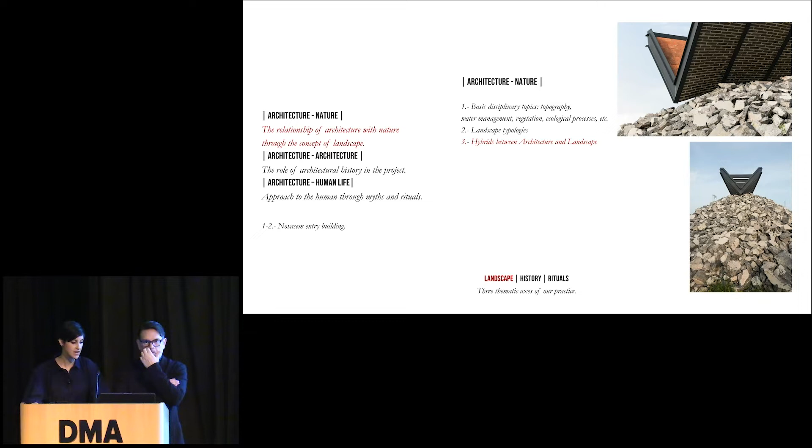Then we decided to mix those typologies with architectural elements to produce moments like this, where a brick roof is supported by a stone mound for an entrance building, or where the spaces between buildings could be understood as places where the void becomes a human experience in relation to the landscape.

Our second axis is the relationship of architecture with architecture itself, through the subject of history. For us, the presence of the past is a very important matter for the discipline, as we include our practice in the idea of continuity.

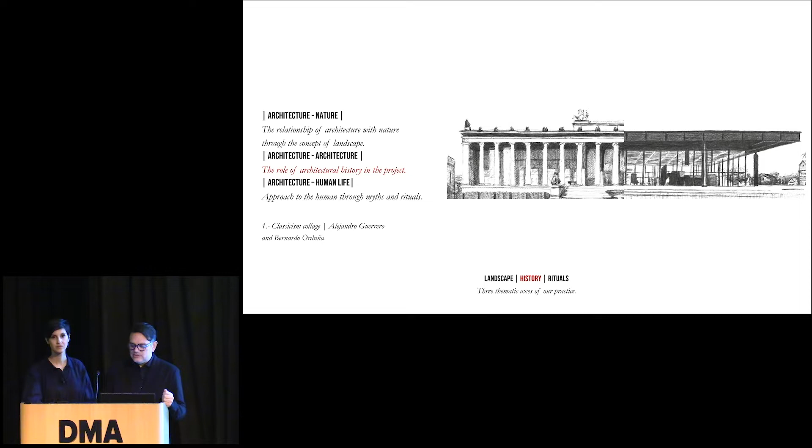As our dear friend, the architect Carles Muro, told us a few weeks ago, and I'm quoting: 'Unlike the historian, for the architect in the present, all the history of architecture is at the same distance.' For us, that means we learn and practice by observing the history of architecture as a whole. From the Doric temple to the modern masterpieces, we consider architecture as a story about tradition and evolution.

Guadalajara, the place where we live and practice, has a strong tradition in architecture. A certain distance from Mexico City and other major capitals of the world perhaps made possible a cultural process of introspection, mainly during the 20th century.

That condition produced very well-known architects like Luis Barragán, writers like Juan Rulfo, and painters like José Clemente Orozco. It didn't mean they were secluded from the world. It meant that having known the world, they came back to recognize themselves within their own culture.

When we start a project, we enter a reflection that can lead us from the definition of a simple architectural element to the conception of a whole system. As with many other practices, the notion of typology is very important in our process, but we have found that certain themes are always present in our minds.

Those themes or ideas, sometimes very architectural, sometimes not, have helped us obtain clarity about what we want to develop in each case. Penumbra, excavation, transparency, perspective, void, monumentality—just to name a few—are subjects that can guide a whole project, and their use has to do with the analysis of every situation.

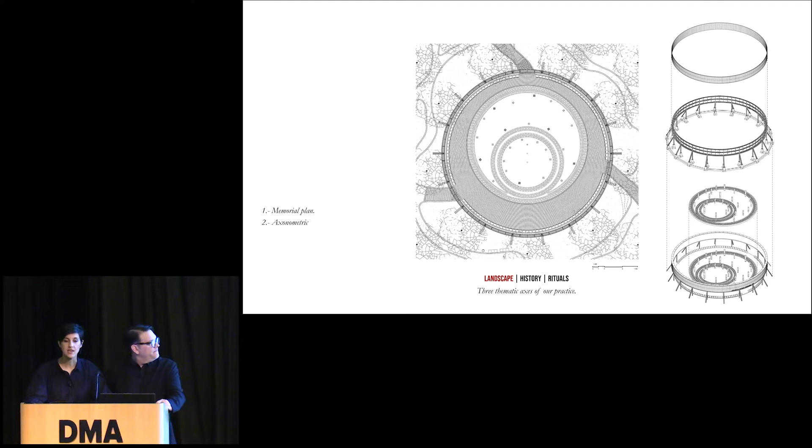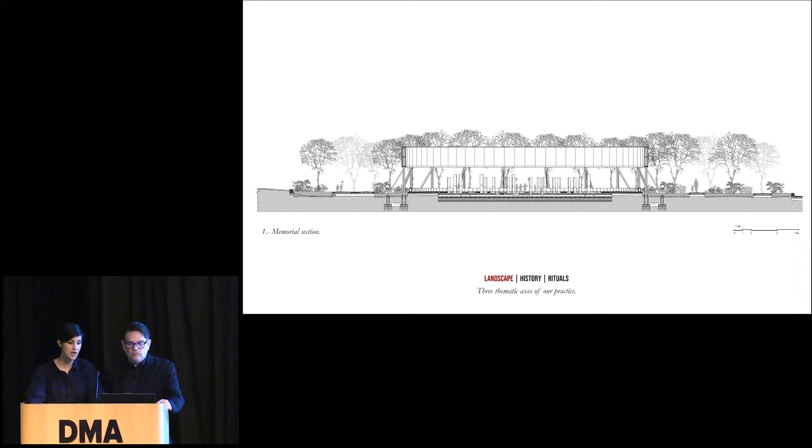Based on the idea that a public space is safer to the extent that its elements do not imply a visual obstruction, and with the aim of making it inclusive and accessible, the construction of the ring was raised almost 3 meters, with the ability to delimit the central space understood as the core of the monument.

The circular lined enclosure of our project, surrounded by 2 rows of magnolias and low vegetation, contains in turn another series of internal spaces which gradually configure small thresholds around a body of water.

The result is an internal void that can be discovered and experienced by wandering through the park into an enclosed space that reunites people around a reflecting pool with the 26 stelae that represent each one of the victims.

The pond is a space not only to be observed, but inhabited, while the stones placed on the water allow the visitor to walk on them and thus interact with the stone and granite stelae and to get closer in a more intimate position.

There are also messages written by the families that communicate the tragedy that are set up in the interior frieze of the ring.

As we mentioned before, each of the monoliths that were placed in the pond have the name or initials of the victims engraved, and also contain symbolic figures according to the wishes of each family.

These symbolic figures represent mainly hummingbirds and butterflies, but for us it was also important to manifest them in real terms by attracting pollinators through the use of a specific plant species.

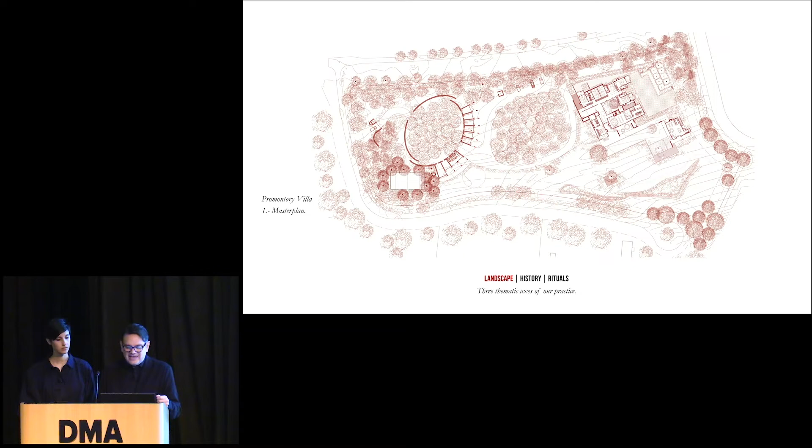The first moment is the oval-shaped garden planted with maple trees that also contains a horse stable. The second moment is a group made of liquidambars that acts as a reception for the entire place. And finally, we surrounded the house with a mound that functions as a limit to avoid views from the exterior.

The project for the horse stable is part of a stone enclosure that functions as an entrance threshold to the property. A series of stone bases with wooden roofs and ceramic coverings are attached to the oval layout of the enclosure that captures a grove as an interior landscape.

This architecture is in fact a reinterpretation of the local construction system in which load-bearing stone walls support layers of wooden elements such as beams and framework, and that is finally covered with traditional ceramic tiling. But we believe that the curved trace of the building modifies the aspect, giving a sense of contemporariness.

The house is organized using the central patio typology, accommodating a series of modules that contain public and private rooms, and in whose middle spaces we can find visions that escape towards the exterior landscape.

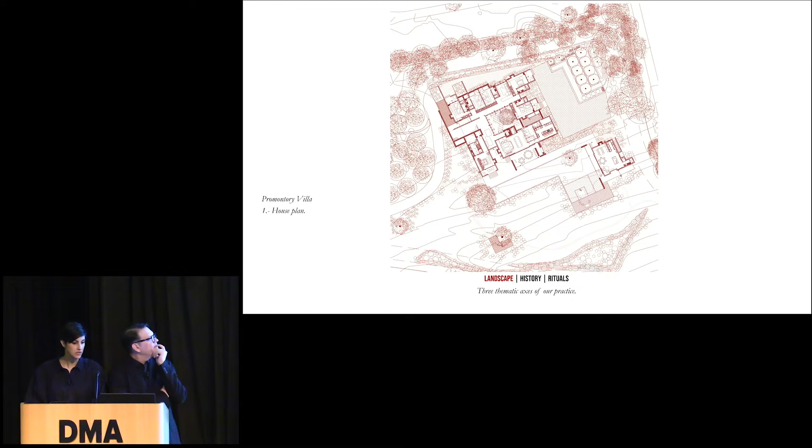This conception based on fragments refers to the idea of village, understood as little town. To reinforce this idea, each of the rooms has a fireplace whose vertical geometry is clearly manifested in the general composition of the complex. In this image, we can see the relationship of the mound, full of endemic vegetation, with the house.

The mound helps us create a more intimate space within the landscape. With a merge of ornamental and native flora, the landscape recalls the prairie character typical of this region. The architecture proposed tries to recall many elements of the Alpine traditional construction of this place, such as the use of wood, shutters, and lintels, but used in a contemporary way due to a subtle abstraction process of the elements.

The fragmented conception of the house through little individual modules allowed us to produce, on the one hand, the image of this little town, and on the other hand, to accommodate a very large family in different rooms. We believe this is a project in which we could experiment with the idea of this fragmented system, where the architectural form is not very controlled by the architects in terms of composition.

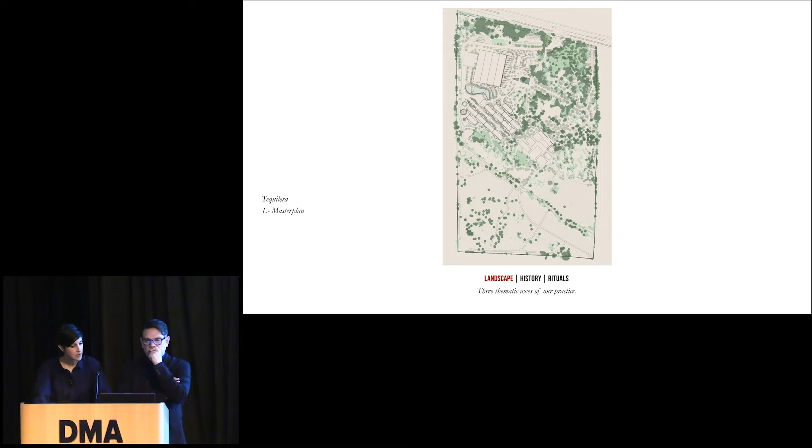As we wanted to relate as much as possible our project with the narrative of the volcanic origins of the landscape, we decided to work with stone extracted directly from the site, having as a result the immediate adaptation of the architecture with the place in material and geological terms. As part of the landscape strategies, the stones are revealed in gardens to show the mineral strata of what exists below the subsoil and remains most of the time invisible.

At the beginning of our intervention, we said we were interested as a practice in the possibility of blurring the limits between architecture and landscape. So we took advantage of the opportunity of this project to carry out what we consider a hybrid between industrial architecture, craft, and landscape. As a first operation, in order to obtain a flat platform where we could develop a 6,000 square meter building, we implemented a huge excavation in the slight slope of the natural topography.

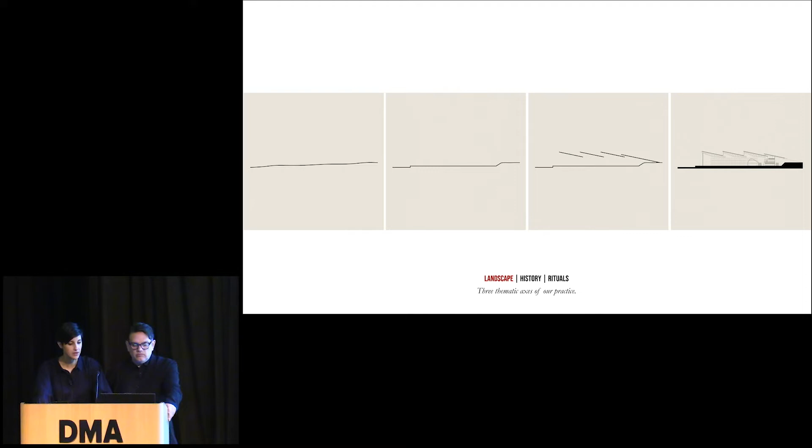The client commissioned us to make a building for a warehouse with offices and other services. The implementation of a massive steel structure allowed us to obtain a flexible system that could house those different uses, applying variations whenever needed.

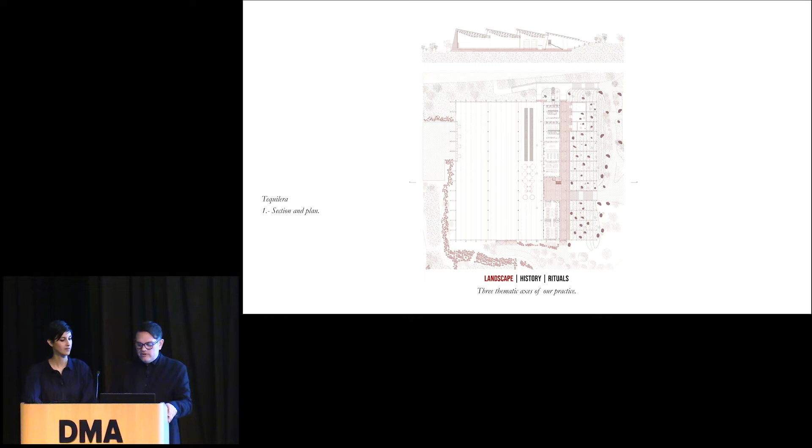The hybrid at a constructive level consisted in mixing the steel structure with brick load-bearing walls and brick vaults. Those traditional construction systems were taken into another scale in order to produce an architecture capable of being read simultaneously as monumental, traditional, and contemporary.

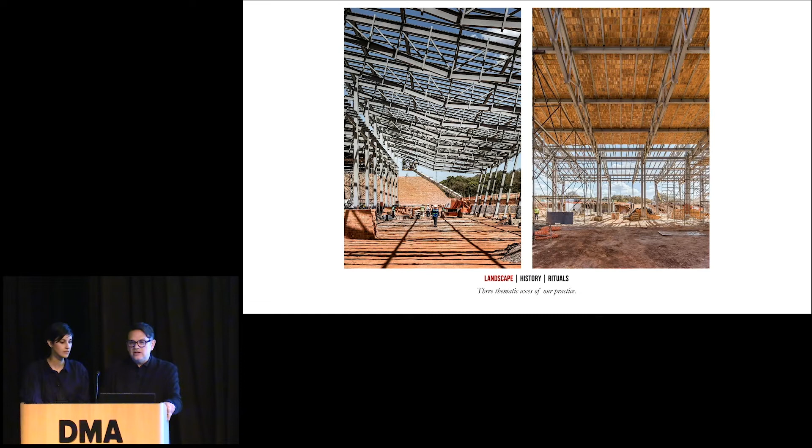The building, during its construction process, accounts for that hybrid condition to which we refer. The use of load-bearing walls can be seen on the outside, and the use of metal trusses can be seen on the inside. The use of structural buttresses, in addition to working as a reinforcement, gives the building a certain historical air that also interests us as a disciplinary continuity, and the sawtooth roof evokes the most classical industrial architecture.

The main idea for the building consisted in making it land into the ground, having in mind the difference in the pre-existing topography. How can we make a structure that has something to do with the earth in a broad sense? How can we build something that can belong to the site at many different levels?

Since we were asked to design a large-scale structure, we decided to make a building that had a topographical relationship with the land through an excavation to build what we call a ceramic horizon. This strategy would reduce its presence on the site.

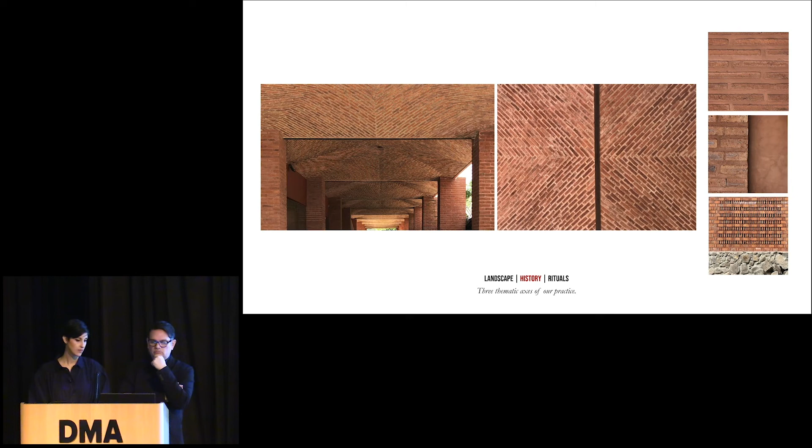Although none of these former buildings had heritage value, we decided to recover them and integrate them into the new complex, to which we added 3 new elements: a library as the facade of the complex, a longitudinal service building with music and dance classrooms and an open-air amphitheater, and finally, a large central reflecting pool.

The location of the new buildings was done so that they function as limits and so that their presence conveys the idea of enclosure.

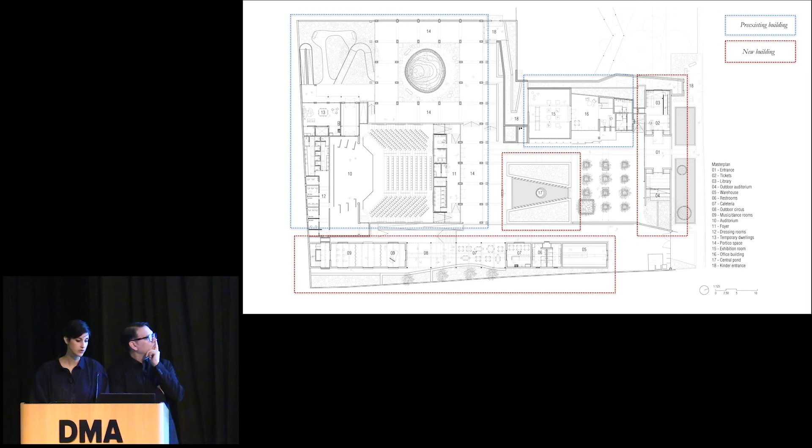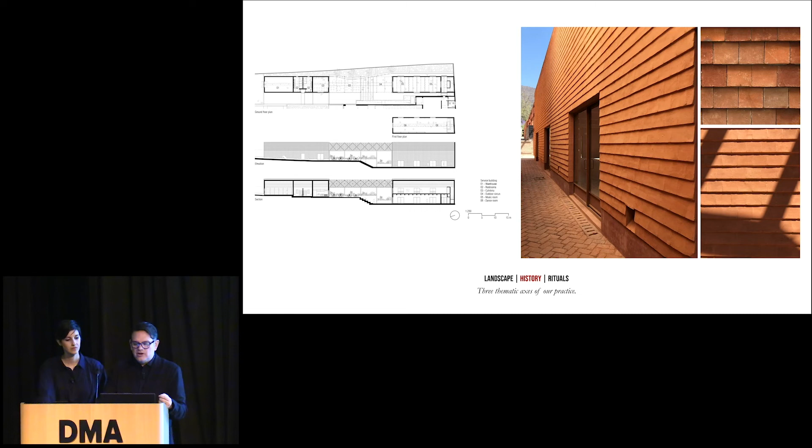The first building we placed in the east part of the plot, producing a strong limit as it is a very long piece. We implemented a shingle-style cladding for exterior walls and roof, a resource that we love and that we have seen in the San Francisco and Boston area, but that in reality is a form that we can find in the traditional architecture of many regions. In Mexico, we know it as tejamanil, and we decided to implement it with a very traditional and local ceramic product.

Containing dance and music halls, a cafeteria, and other services, the project takes advantage of the topography, transforming its section from a 1-story to a 2-story building. In the middle part, there is a steel structure with a textile covering.

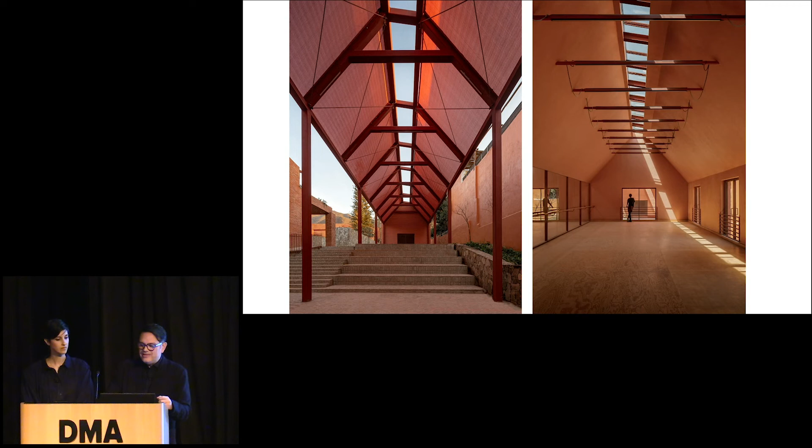In the upper floor, there is a dance room characterized by an overhead light that runs through the entire vault. The interior of the space has been conceived as a long fugue in visual relation with the small open-air amphitheater. It is a long internal perspective that responds to how the body moves through the space.

As part of the spatial system in the master plan, we decided to place the library building facing the avenue, where it could have a strong urban presence. The brick vault is a gesture that connects with the traditional architectural language, producing a sense of belonging with local people. For us as architects, it also connects with the history of architecture as a whole, representing the presence of the past in contemporary architecture.

The library building was solved in section with a sawtooth roof that illuminates the reading room on the first floor, and a brick vault at the ground floor as a unique architectural form to communicate the idea of the main entrance to the complex, a threshold.

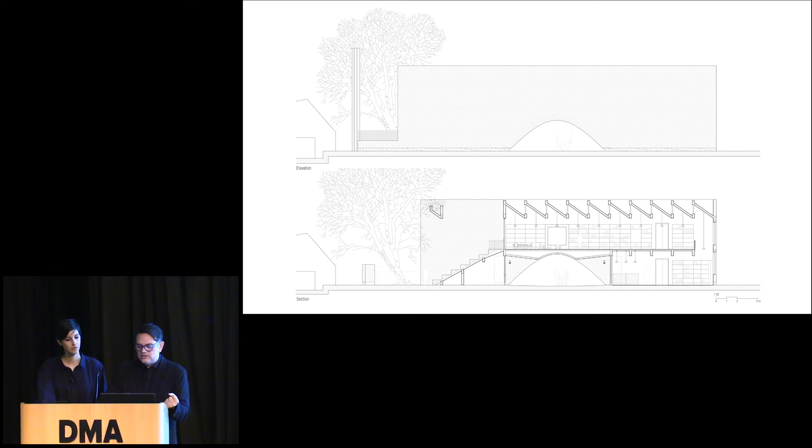The building was built entirely with brick load-bearing walls and shows the possibility of artisan labor even for public commissions, where it's very difficult to apply these construction methods. An attitude not far from some ideas of the postmodern period of architecture, but certainly very different in spirit.

In the interior space, the sawtooth roof allows the entry of diffused light through the use of glass blocks. The interiors were made using terracotta colored cement coating to give a sense of uniformity to the entire building. It is actually a multi-purpose space in which children's activities, book presentations, and all kinds of meetings are held.

One of our main decisions for the complex had to do with how we decided to occupy the available space. Just as we decided to build the new structures at the limits of the plot, we took the decision to occupy the central space with a landscape feature instead of a building. The oblique interior trace of the planters, like a fugue, produces an even greater sensation of depth in the space.